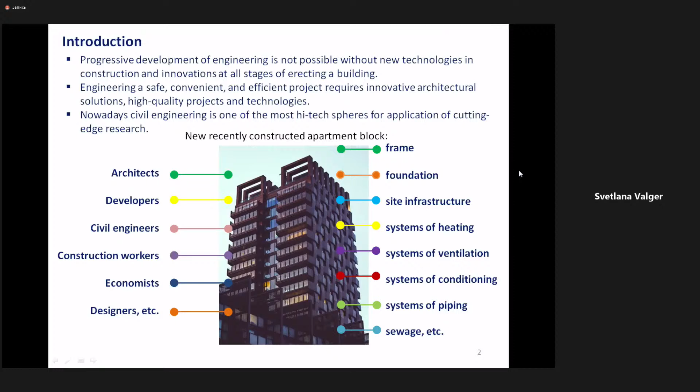Now let us consider the territory of this imagined building, the lot of land it stands on. We can see that the building is not separate from its surroundings and does not exist in a vacuum. It should match its surroundings and work as an ensemble with the other buildings in the vicinity. It should fit into the transportation system and be connected to the service lines of the city.

If this network of connections works efficiently and in a well-coordinated way, life in this kind of urban environment is safe and comfortable for pedestrians and citizens. The faster a city or town develops, the more complicated the service and adaptation of this system to new additions into the cityscape becomes. This is the reason why development and implementation of innovative solutions is so important in civil engineering.

Another topical issue for modern city planning is the development of urban planning and infrastructure within the framework of rational environmental management and sustainability. Anthropogenic impact on the environment grows every year, and the dynamic system of a modern urban settlement must be based on the principle of minimizing this impact and prioritizing preservation of the already existing natural landscape. Anthropogenic impact of a city on the existing ecosystems of the territory under construction should be motivated and justified, and urban sprawl and growth of industrial clusters pose challenges for the international research community.

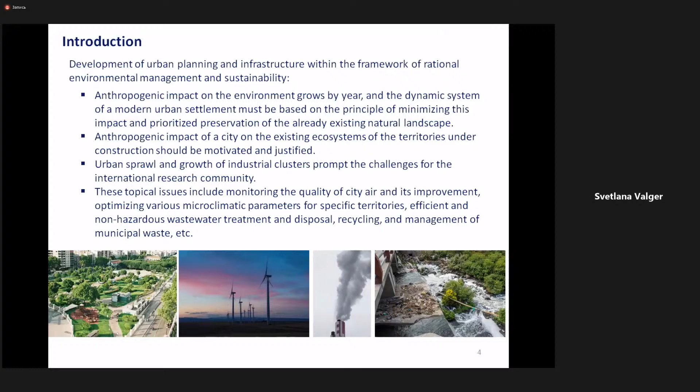Here we see several pictures. I put two very nice pictures about the location of green zones in the city and wind energy technologies integrated into city structures. The third and fourth pictures are not very good, showing pollutant distribution and waste. So in our case, we have to use modern technologies to create scenarios like the good pictures and avoid outcomes like the bad ones.

It's common knowledge that the technology breakthroughs of recent decades have made digital technologies an essential part of daily professional activities of architects, civil engineers, designers, and other specialists. Record-keeping, design and visualization of the architecture vision, calculation and engineering are nowadays highly digitalized processes. We have specialists who are experts in this process, and all routine work is processed by program complexes and software, numerical simulation and algorithms, but not an expert.

It's now impossible to imagine development of new construction materials, experimental research, new building projects, and practical tests of new construction methods without computing technologies, numerical simulation, CAD and CAE systems. We will speak about these definitions a little later, in the second part of our presentation about modern software, computer-aided engineering, and computer-aided design programs. Digital solutions are also necessary for processing the data of physical tests, computing experiments, and engineering calculations.

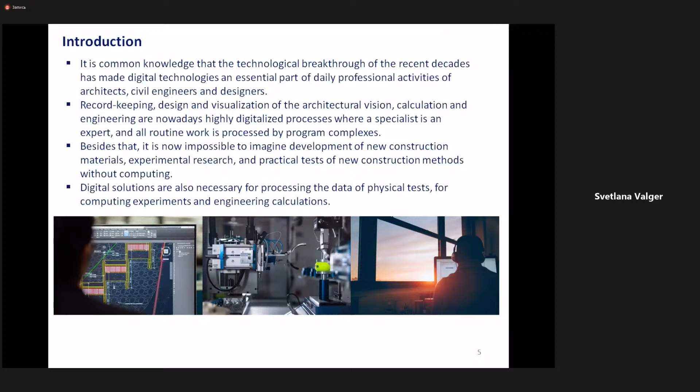Our first goal for today's lesson is to obtain information on exciting digital technologies in city planning and give definitions of several key terms common in this field nowadays. I hope this part will not be very boring for you, because of course we will have several key terms and definitions, but I hope it will be interesting also.

This is our content. The first part of the presentation is the smart city concept. We will speak about definitions like smart city, virtual city, industrial revolution, and additive manufacturing. The second part will be about classification of program complexes for engineering solutions - computer-aided engineering programs, computer-aided design programs, computer-aided manufacturing programs, building information modeling, and other questions.

The third and last part of our presentation today will be about numerical simulation of urban aerodynamics using computer-aided engineering programs. I will show several cases of numerical simulation for aerodynamics. We will speak about applications of computational wind engineering in environmental problems, and I'm sure it will be very interesting for all of us.

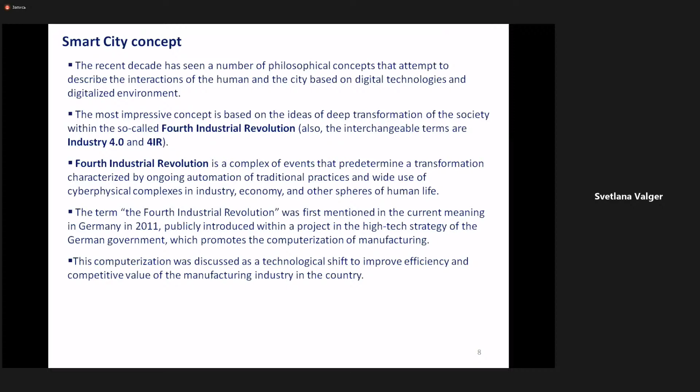It sounds beautiful. In the article of Klaus Schwab, who is a Swiss economist and executive chairman of the World Economic Forum, he presented his vision of the transformation within the paradigm of the fourth industrial revolution and listed the major challenges for the people, for citizens, caused by it.

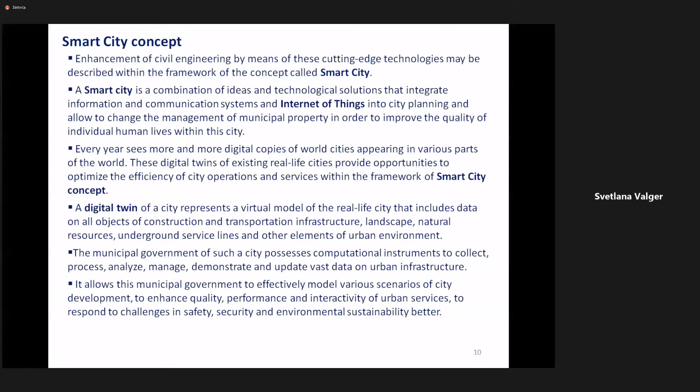And on the next slides, we will speak also about applications of smart city in environmental problems and in civil engineering, and I show several interesting examples.

I would like to show two examples. The first example is digital city technologies in Singapore. You can find more information about this project on this website, and I would like to make a short review of this project. During the recent decade, the authorities of the city-state have been investing into the development of Singapore's digital twin.

His name is Virtual Singapore. Virtual Singapore is a dynamic 3D model of the city and the platform for coordinated data for processing, for analysis, and this platform can be utilized by state, private, and research operators to manage assets, resources, and services to improve the quality of city planning and to develop protocols for possible emergencies, technogenic and environmental catastrophes.

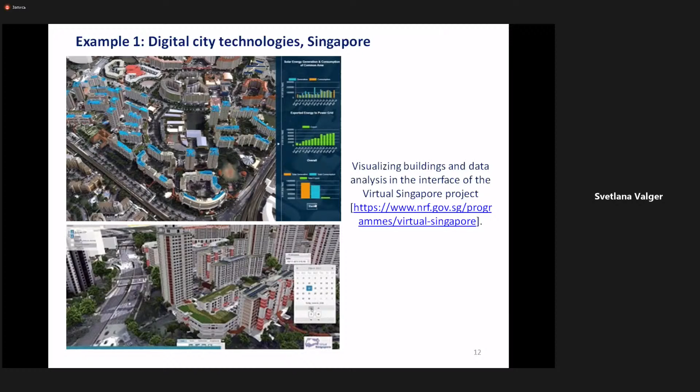So, if we speak about Singapore experience from the point of view of the enlisted information technologies, Virtual Singapore is a combination of instruments of semantic 3D model of individual elements of the city and its environment. This model includes geometrical models of city, buildings, civil structures, any objects, including the exterior and interior surfaces.

Information about water bodies, vegetation, and other landscape elements, the system of transportation infrastructure. It could be also different metadata about materials, building materials, for example, and data collected and stayed on public agencies, updated and enhanced by means of geospatial and other platforms such as OneMap, People Hub, Business Hub, etc.

This meta model has a considerable advantage. First of all, it enables to add new layers of data and metadata instantaneously to the authentic digital model. If we have changes in our city, we have changes in our digital model.

And one can access data from a wide range of sources of dynamic statistical city data and various extra information in real time. For example, we can obtain statistics and analyze it about climatic data, commuting, demographics, and others.

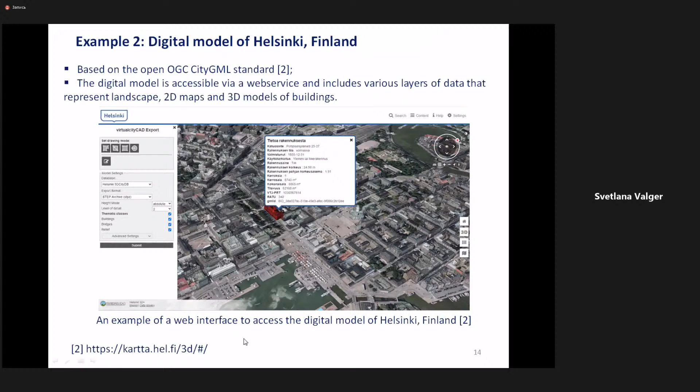So, what applications can be realized using smart city concept more efficiently?

Above all things, this kind of model must have a purpose of processing geometrical, statistical, and other data for future engineering and mathematical modeling of possible situations and city management. Here I show just several examples of what applications we can realize.

Using the smart city concept, using the digital twin of a city, and in the third part of my presentation today, we will see different kinds of problems, different solutions, and different cases. Here are just several problems.

It's the air quality problem: control, monitoring, and calculating different scenarios of pollutant concentration distribution in the air of the city. As we know, it's a big problem for large cities, and it's necessary to control pollutant dispersion and gas dispersion. We can use a digital twin model of the city to model, using computational fluid dynamics methods, for example, micro-scale parameters of distribution of heavy gas and pollutants.

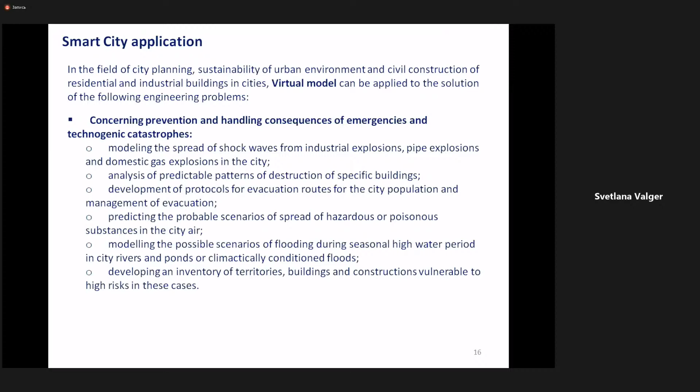The next one is modeling the possible scenarios of flooding during the seasonal high water period in city rivers and ponds under climatic conditions, and developing an inventory of territories, buildings, and constructions at high risk. So it's about the opportunity to use such models and technology to prevent technogenic catastrophes and different kinds of emergencies.

The next one concerns rational environmental management and sustainability issues. For example, it's the calculation of noise pollution or acoustic problems in specific territories caused by various sources, such as noise pollution from highways, airports, industrial buildings, etc. It helps us make our districts and buildings more comfortable and healthy.

So, the calculation of heat pollution of urban territories and prognostic parameters of the city's heat island effect. Probably you know that in cities, the temperature is higher compared to the surrounding area. This effect is the heat island effect, and if we can control or manage it, it can help us reduce energy sources for our city, for example. It's an interesting fact that now in Siberia it's minus 17 degrees, but that's of course not a reason to be upset.

So the next one is modeling microclimatic parameters and microclimates of individual areas. It's also about the heat island effect — different microclimatic parameters like humidity, wind flow direction, wind flow speed, temperature of air in the city, etc. The next one is analysis of the potential for alternative energy sources.

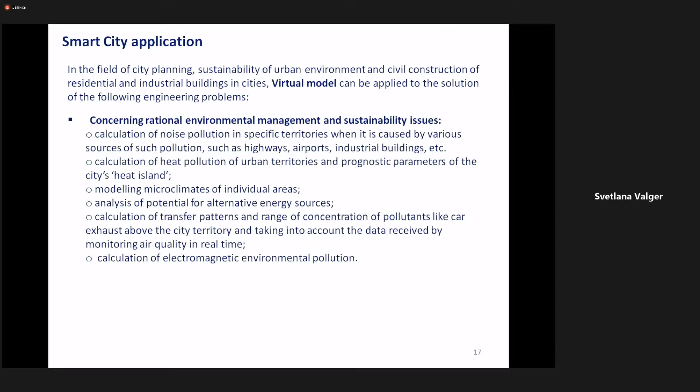So, the next group of applications concerns city planning. We can solve more efficiently such questions as choice of location for new buildings and design of buildings. We can use visualization for the suggested project in the context of the existing building area by means of a 3D model. For example, you have a beautiful 3D design of your building, but you can't imagine how it will be involved in the surrounding area, or if we already have a densely built area, like in city centers of large cities, it can help us visualize our design and understand if it's okay or not.

The next one is application of innovative high-tech solutions and technologies in engineering unique objects. For example, it's the research and assessment of aerodynamic loads, elasticity loads, and snow loads on specific buildings, bridges, high buildings, and calculation of pedestrian comfort of specific territories, etc.

And the last one is the application of innovative technologies for the development of optimal schemes of connection of buildings to the city service lines, operation decisions on service line management, repair and development of them. It can help us be more accurate in the sphere of using resources.

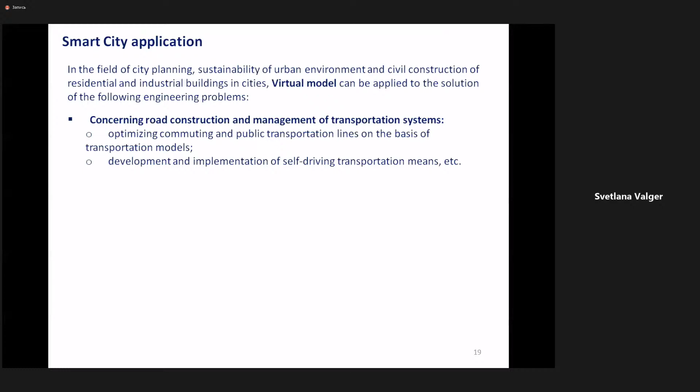So, the last point of this part of the presentation is about integration of the technology of smart city and Internet of Things. We already know the definition of Internet of Things, and we already know the definition of digital twin, but these terms should work together - there needs to be a necessary level of integration of the model into the Internet of Things. This concept implies that objects of infrastructure shall be equipped with technologies that allow them to interact with one another in the environment. The digital twin of the city typically interacts with the Internet of Things by means of various sensors, detectors, trackers, and gadgets.

For instance, sensors that monitor road pollution, noise level, temperature, microclimatic parameters, road congestion, etc., may transfer their data to the digital model of the city and become triggers for finding solutions and changing the schemes of regulators and city infrastructure, such as traffic lights and other means. These technologies work together - such systems can rearrange and improve economic and social processes and help us optimize management of city assets and property. It's possible to reduce energy consumption, optimize traffic, and increase general comfort of citizens using these technologies together, the smart city model and Internet of Things.

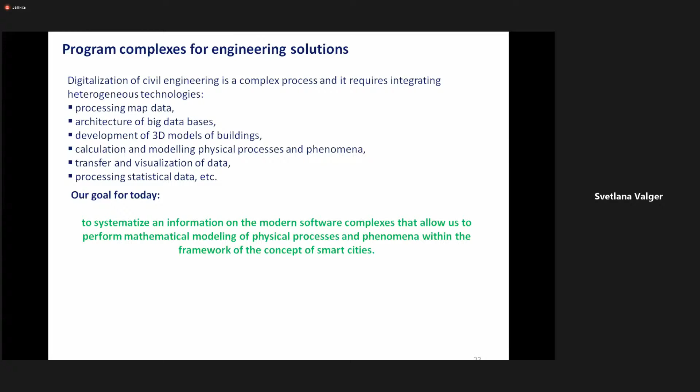Our goal for today, the second goal of our presentation, is to systematize information on the modern software complexes that allow us to perform mathematical modeling of physical processes and phenomena within the framework of the concept of smart city. First of all, I would like to show you several definitions. These are very general definitions, just terms for our next slides to make it easy.

The first one is application suite, as a complex of application software and programming software of related functionality. Most often they share a similar user interface and are able to exchange data with each other.

Also, it's a very general definition of computer-aided technologies. Probably you know these computer-aided technologies are application software, programming software, and all technologies aimed at aiding specialists in design, implementation, analysis, and manufacture of products.

Also, probably you know the subject definition like PLM. Sometimes you see engineering software with the prefix PLM. PLM is product lifecycle management, a set of technologies to manage the entire life cycle of a product from inception through engineering, design, and manufacture to service and disposal of manufactured products.

The last definition on the slide is building information modeling, BIM. It's IT technology, IT modeling of buildings. I can say that it's not just a technology, it's an ideology of modeling that involves generation and management of digital representations of physical and functional characteristics of places as databases and systems of data concerning planning, design, construction, operation,

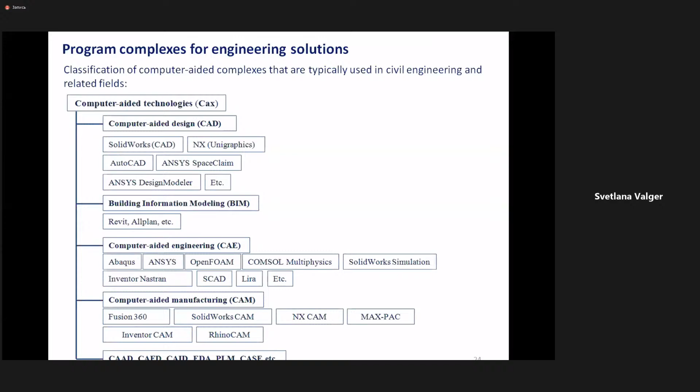For example, it can be Fusion, SolidWorks, NX, MAX-PAC, Inventor, RhinoCAM, etc. And of course, we have a lot of additional definitions for computer programs, and in our lecture we will not speak about them.

Computer-aided design programs, or computer-aided design systems, are used for drafts, technical figures, 2D or 3D digital models of manufactured and engineered products and their systems. The target audience for such software are architects, civil engineers, graphic design professionals, and sometimes other specialists from different departments, for example machinery engineers or somebody like this.

Modern CAD systems differ in their approach to geometrical modeling. In computer-aided design systems, we speak about geometrical modeling, 2D and 3D spatial modeling. It can be parametrical or direct geometrical modeling, and being equipped with special add-ons for executing drawing packages in a specific field, like civil engineering, machinery, or aerospace. For every field we can have special packages which integrate with CAD systems and help to make our 2D and 3D models.

An example of this is, in Russia, the CAD system AutoCAD. It's extremely popular for executive drawing packages, as it allows drawing and drafting in accordance with localized norms, standards, and rules, and this is usually very important, because it's easy to use if you have a special database with nodes and standards, and you don't have to develop new libraries.

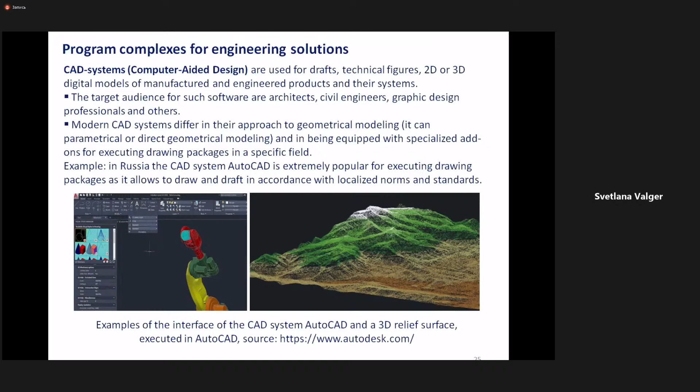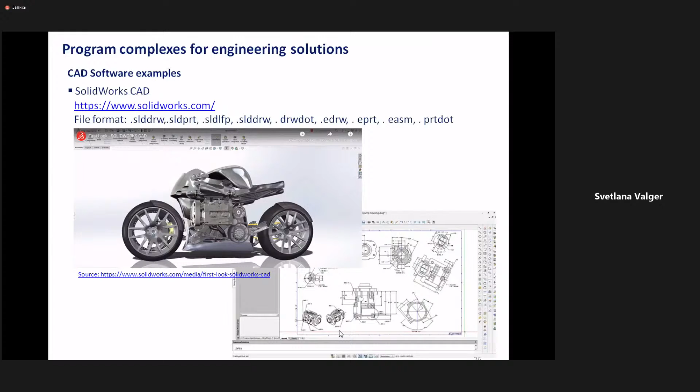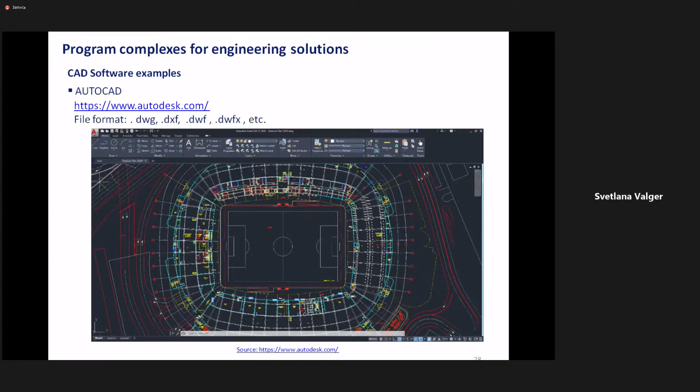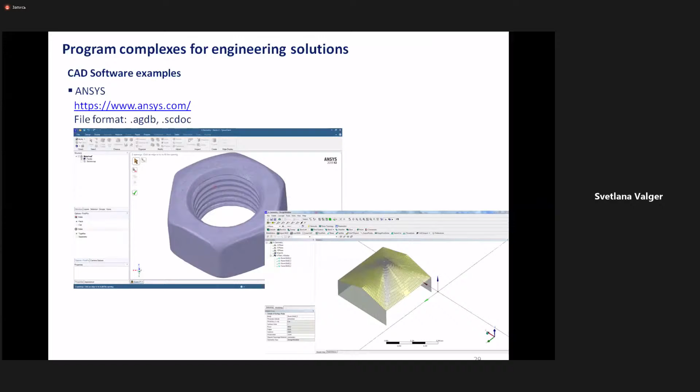The next example is ANSYS. ANSYS is my specialty, I think, because I've worked with ANSYS software for a long time. Here we can see also the www.ansys.com site and the file format for this CAD software. It's interesting to know that ANSYS in this way is not only a CAD system, it's also a CAE system, but about this we will speak a little bit later. Here we can see Space Claim and Design Modeler interfaces for our CAD software complex.

So the next definition is CAE systems - sometimes we say CAE systems, computer-aided engineering systems. It's a new definition for us. Computer-aided engineering systems are used for digital modeling of various physical processes and phenomena. If we speak about CAD systems, we speak about models, about 3D geometrical models. If we speak about CAE, it means that we speak about calculations.

Such systems are used for digital modeling of various physical processes and phenomena, including problems in environmental modeling and design of equipment, instruments, and various infrastructures. Computer-aided engineering complexes are a type of software aimed at providing solutions for engineering and research problems in prediction, analysis, and calculation of parameters of physical processes and phenomena.

In most cases, computer-aided engineering systems and packages of software are based on digital representation of numerical methods for solving differential equations. Oh, mathematics. In our life, we have mathematics. Yeah, mathematics is very important.

We have different kinds of numerical methods, and I put just a general list, but it's not all. There's finite volume method (FVM), finite element method, finite difference method, and others. For example, smoothed particle hydrodynamics method (SPH), etc.

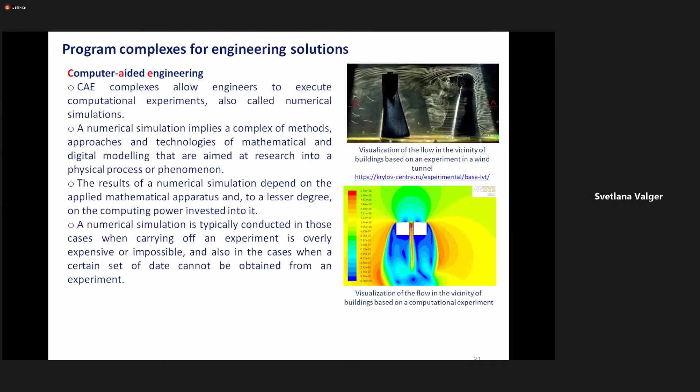As a rule, computer-aided engineering complexes are aimed at addressing the problems within a specific field of physics or for a specific industry. For instance, there are specialized program complexes for computational fluid dynamics (CFD) and finite element analysis (FEA). Let's start to tell about computational fluid dynamics, CFD.

CFD is a branch of continuum mechanics, a science that addresses the issues of predicting parameters of liquid flows and gas flows based on physical, mathematical, and numerical methods that enable calculating the characteristics of a flow. For example, you would like to investigate mass transfer processes, heat transfer processes, chemical reactions, or concentrations of individual components of a multi-component flow phase, etc.

Here I put several examples of CFD problems from different sites - some are my own results, and other pictures are from websites. These are examples of CFD problems and results, demonstrating different kinds of results for different physical problems. For example, it's a multi-phase flow in a tank with water and air, or it can be wind flow in the vicinity of two buildings, or wind flow around building systems, like in this case.

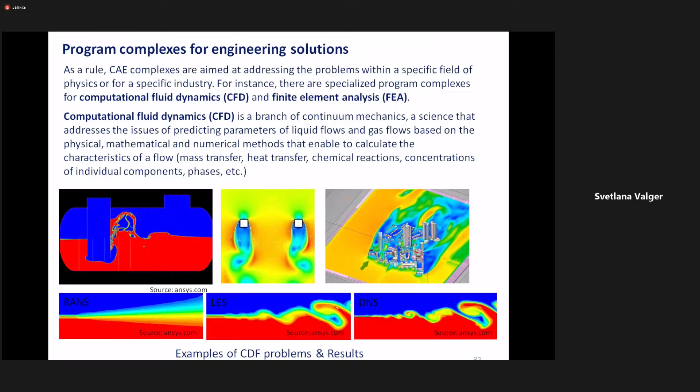It can also be turbulent flow, for example in a channel or something like this, and it can be calculated using different numerical methods in CFD. The object of research in computational fluid dynamics is a liquid or a gas. In English, it's just a fluid.

Examples of CFD applications include numerical modeling of the transfer of car exhaust and calculation of its concentration above an urban territory. This is a task that can be solved by means of CFD methods.

The next example is a solution of a problem and assessment of aeration of a specific territory based on detailed physical and mathematical modeling. Look at the picture. It's an example of numerical simulation of aeration within a city district.

The photo shows speed 2 meters above the ground level. We can evaluate velocity speed in different zones. We can see the wind direction from this angle, and we can see high wind speed in this zone, in this channel, and in this zone the maximal velocity is in this place. We can analyze this picture.

We can do additional solutions. For example, we can design new green zones, parks, or develop new technologies to eliminate such high wind speeds. For example, we can put several trees in this zone and see, in our scenario, in our CFD modeling, what we will have as a result.

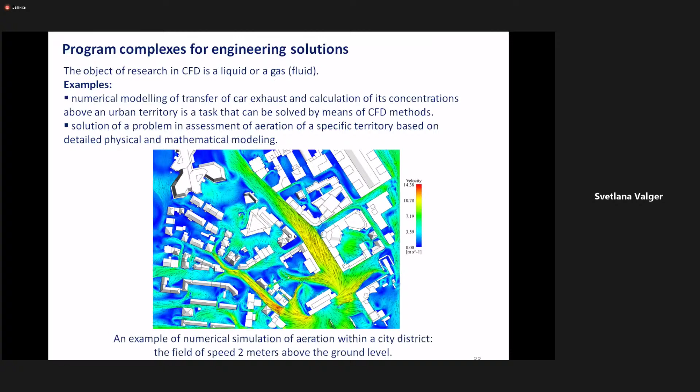Functions implemented in computer-aided engineering CFD software usually model physical processes and properties of liquid and gas media. It can be external flow and internal flow. External flow is, for example, in aerospace engineering, or wind loads on buildings calculation. Internal flow is flow in channels, for example in piping systems, pipes and tubes and other channels.

We can also calculate multi-phase and multi-component flows with different kinds of particles, drops, bubbles present in the presence of a discrete phase.

Of course, it's necessary to model turbulence in practical applications - turbulent flows, flows with chemical reactions, for example emission transformation from cars, and natural and forced convection. This applies if we speak about thermostats of rooms, or thermostats of building systems of conditioning, heating and ventilation.

It's a problem of conjugate heat transfer - joint modeling of the thermal regime in a solid, for example in civil structures, and in the surrounding gas volume, for example wind. Also thermal radiation, solidification and melting and related processes, magnetic hydrodynamics problems, acoustic, subsonic, supersonic and hypersonic flows for different kinds of applications, and complex properties of fluid, for example non-Newtonian fluids in oil and gas manufacture.

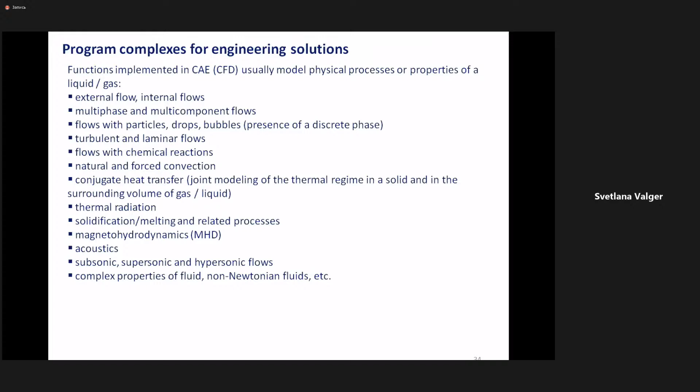So what applied problems of CFD can be solved in the civil engineering field and in the field of open environmental problems? It's wind load on buildings, aeroelastic phenomena, for example in the design of bridges and high-rise buildings. It's very important to take into account aeroelastic phenomena and put additional loads in calculations.

It's hydrodynamic loads on objects of hydraulic structures, external aerodynamic and hydrodynamic loads on oil platforms, for example, and modeling flows in pipelines, microclimate parameters in buildings, heating, ventilation, air conditioning systems, filtration tasks through enclosing structures, heat exchange through multi-layer enclosing structures, design tasks for water treatment facilities, sedimentation, filtration, water treatment, design of wind power plants, tasks of assessing scenarios and parameters of smoke pollution.

For example, in cities, like now in Novosibirsk, and movement and filtration of groundwater, etc. So we have a lot of applications where we can use CFD functionality in the field of civil engineering.

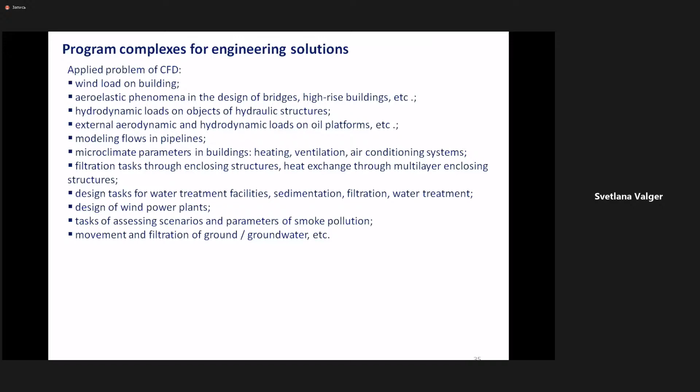The next point is computer-aided engineering - finite element analysis methods. Finite element analysis, or FEA, is a method of computational analysis that allows us to predict the behavior of complex structures. Finite element analysis has become widely popular in solving problems connected with calculation of reactions of structures and constructions to various types of mechanical, heat, and electromagnetic loads and their combinations.

Functions implemented in computer-aided engineering software with finite element analysis usually describe the behavior and properties of structures under different types of loads. It's stress-strain analysis - the most popular - strength testing according to various criteria, buckling analysis, modeling of nonlinear fracture dynamics.

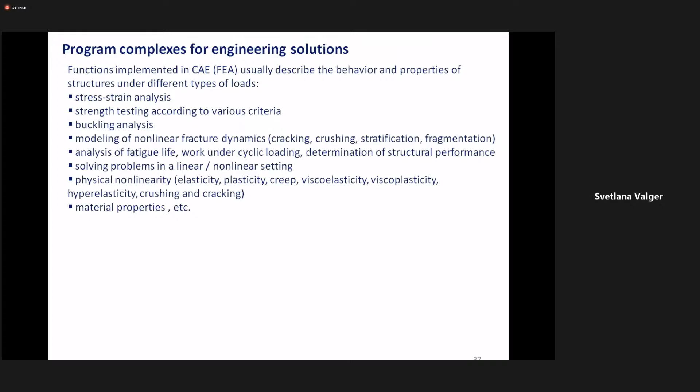This includes cracking, crushing, stratification, fragmentation, analysis of fatigue life, work under cyclic loads, determination of structure performance, solving problems in linear and nonlinear settings - physical nonlinearity, elasticity, plasticity, creep, viscoelasticity, viscoplasticity, hyperelasticity, crushing, and cracking - and the opportunity to model complex properties of materials.

So we have a lot of applied problems of finite element analysis in real life and in civil engineering. It's design of buildings and structures, calculations of stress-strain of structure elements, calculation of forces and displacement from load combinations, and selection of reinforcement in elements of reinforced concrete structures, for example checking the bearing capacity and selection of sections of structural elements.

The second one is the problems of geotechnics and design of foundations tasks. It's analysis of strength and stress state of foundation of buildings and structures, checking the strength and stability of systems, evaluation of the stability of foundations, and calculation of shear safety factors. Design of retaining walls, tunnels, and other tasks of geotechnics in the field of filtration, poroelasticity, groundwater behavior, etc.

The next point is the thermal tasks and tasks of heat engineering. It's the energy efficiency of the building, calculation of enclosing structures for resistance to heat transfer, material behavior under low temperature, calculation of thermal deformations, and - very important - the problems of safety of buildings, fire safety tasks, calculations on fire resistance of structures and materials. It's also very important today for design of buildings and structures.

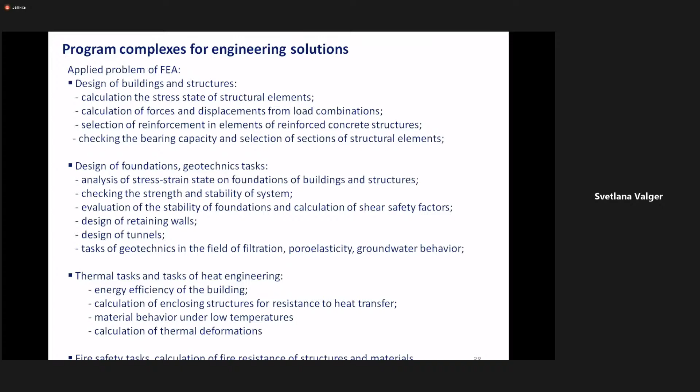In CFD software, we can say about ANSYS software, ANSYS CFX, ANSYS Fluent. This software is used in Novosibirsk State University of Architecture and Civil Engineering in different kinds of investigations and in teaching process. And StarCD, Autodesk Simulation CFD - it's interesting because Autodesk, it's a software on geometrical model, it's a CAD system, but Autodesk has a lot of add-ons now to model different processes, for example, in the field of computational fluid dynamics. And COMSOL Multiphysics, SolidWorks Flow Simulation, FlowVision, OpenFOAM, Phoenics, etc.

In examples of finite element analysis software, we can set ANSYS Mechanical, Abaqus, Autodesk Simulation, COMSOL Multiphysics, CosmosWorks or SolidWorks in the part of CAE system. SolidWorks has a CAD system and CAE system together, and LS-DYNA, Nastran, etc.

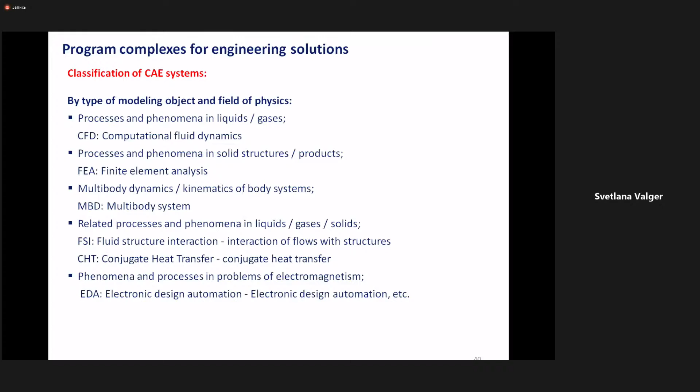The next classification of computer-aided engineering systems can be completed by industry. For example, computer-aided engineering in civil engineering - in Russian we have well-known software like Lira SCAD, and other software like APM Civil Engineering, etc.

Computer-aided engineering in mechanical engineering problems - it's, for example, SolidWorks Simulation, Autodesk Inventor. Also we have computer-aided engineering in problems of electronics, for example ANSYS Electronics Desktop, and multi-physics computer-aided engineering complexes, which can help us solve problems in multi-physics, or for example in FSI, fluid structure interaction analysis, or CHT analysis.

It can be ANSYS, Abaqus, and it's also important to note that today many various computer-aided engineering software are combined. Sometimes, for example, if you would like to calculate something, you can use computer-aided design Autodesk or AutoCAD and make a 3D model in this program, and after this you can transfer your model to the next product, for example to Abaqus or SCAD.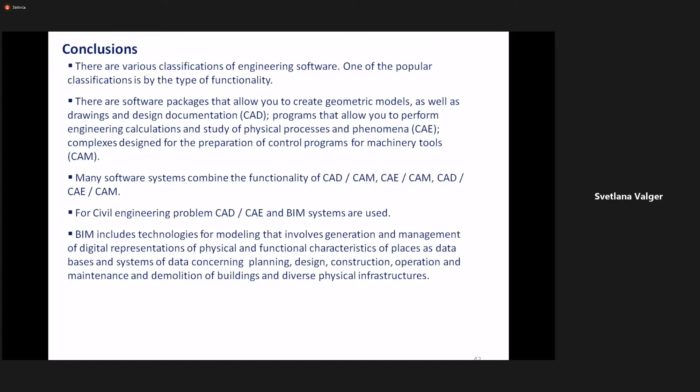So BIM includes technologies for modeling that involve the generation and management of digital representations of physical and functional characteristics of places, as databases and systems of data concerning planning, designing, construction, operation, maintenance, and demolition of buildings and diverse physical infrastructure. So, these complexes allow us to solve engineering problems.

Computer-aided engineering complexes can be classified by industry purpose, by the field of physics - for example, what we would like to investigate: fluids, structures, electromagnetic problems, or heat transfer problems - and by the type of numerical modeling methods, for example finite volume method, finite element method, finite difference method, or other methods.

By the type of licenses, there is much software, free or non-free, and we have to understand what is better for us, for our questions, our problems, and our tasks.

Computer-aided engineering complexes allow carrying out a computational experiment complementing a physical experiment. This means that in computer-aided engineering complexes, we work only with a computer, and we have a numerical simulation on our laptop, for example. In several cases, this can help us understand main features and special features of a process which can't be obtained from a physical experiment.

And the computational experiment, as a rule, includes the following steps - I think it's better to say I will tell about this in the next part of my presentation. The computational experiment, as a rule, includes several main steps.

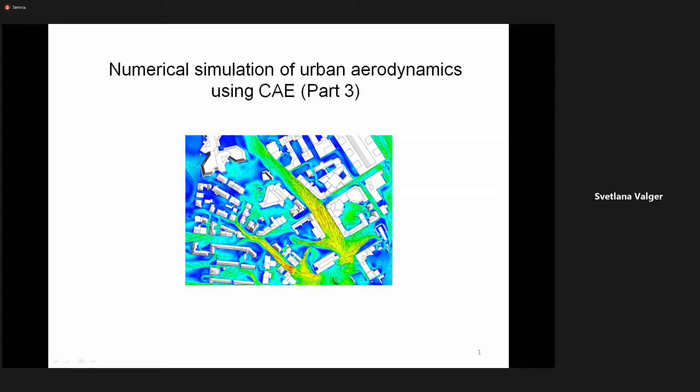So, and the last part of our lessons today will be about numerical simulation of urban aerodynamics using computer-aided engineering. It's part 3 of our lessons, of our workshops and lectures. We can see a very nice picture here. And so let's start, we continue.

Okay, and urban aerodynamics applications. So we have already seen this picture. It's about applications in the sphere of computational wind engineering. I would like to show an additional definition. It's computational wind engineering, or CWE. CWE is an application of computational methods to wind engineering problems. And there are many interesting applications in this field.

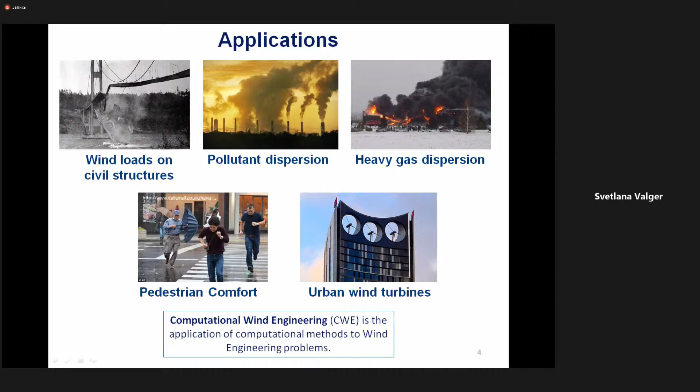It's a calculation of wind loads on civil structures. It's a calculation and control for pollutant dispersion and heavy gas dispersion. It's design and planning of cities, taking into account comfort in pedestrian zones. And it's also about wind turbine design when we integrate wind turbines into the buildings, for example. In this case, it can be very innovative and very helpful and useful to provide additional energy for the building.

So, wind loads on civil structures - why is it so important? Wind actions affect constructive durability, stability, and service conditions of buildings significantly. For high-rise construction projects and buildings with high head resistance, the wind flow substantially increases the dynamic load, and it may lead to stability loss and collapse. Dynamic wind blows that cause oscillation of the building may disrupt the normative service conditions in the space on the top floor of high-rise buildings.

And for construction projects with complex architectural solutions, there is a possibility that zones of wind amplification or zones with negative pressure may appear, and it leads to a change of load spread on the construction. Aerodynamic coefficients in these cases are not known, and it's necessary to make a wind tunnel experiment, or you can make a numerical simulation. The wind action on the construction may lead to the development of aerodynamically unstable oscillation, stall flutter, galloping, divergence, wind resonance. Especially it's important for high-rise buildings and for unique buildings and structures like bridges. Wind loads may cause the collapse of hinged facades, commercial billboards, etc. And that's why it's necessary to calculate wind loads on civil structures.

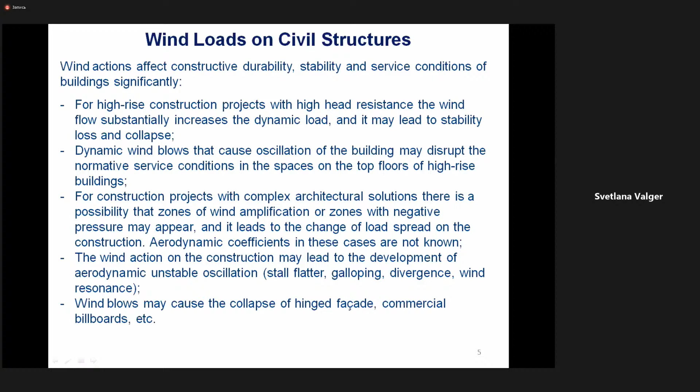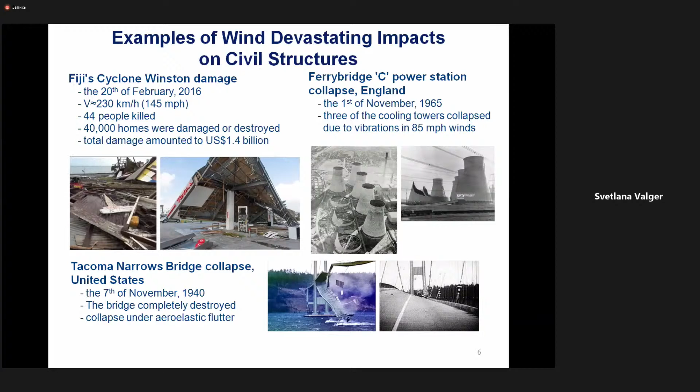Here we have very bad examples of wind devastating impacts on civil structures. It features Cyclone Winston damage, Ferrybridge Power Station collapse, and Tacoma Narrows Bridge collapse. It's a well-known story and fact, and all building aerodynamics started to develop after this incident, after the Tacoma Narrows bridge collapse, because before this story, aerodynamics was usually about aerospace or something like this. After this case, engineers and researchers began to think about aerodynamics of buildings, bridges, etc.

So, and what kinds of solutions do we have to predict wind loads on buildings today? There are three main groups of methods. The first one is wind tunnel experiments. It's a well-known and correct approach, and it's recommended when buildings have a shape that is different from those given in standard rules or any technical rules.

Buildings are located in a complex environment, and the results in this case depend on the technical capability of the facility, because it's very difficult to make a wind tunnel experiment. It's necessary to have a special aerodynamic facility, and of course we have to follow different criteria with wind tunnel. It's necessary to organize experiments with a geometrical model, a physical model of the building or complex of buildings, and usually it's very expensive.

The next part of methods is CFD modeling. I will speak about this group a little bit later, and also technical rules, standards, and Eurocodes. Technical rules and standards are based on semi-empirical formulas and experimental data, but they have limits and can't be recommended when buildings are located in a complex environment, on complex terrain, or have a complex shape.

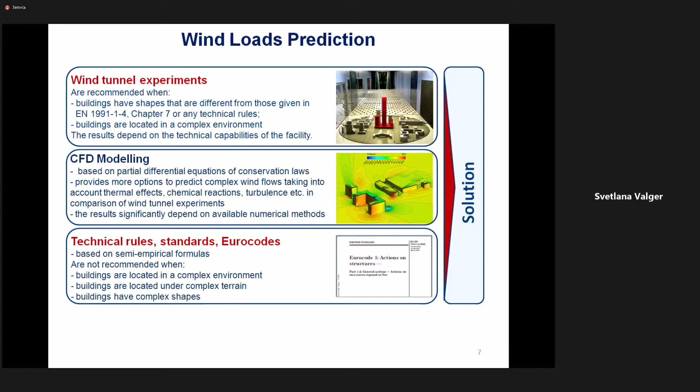The third part of methods is CFD modeling, based on partial differential equations of conservation laws. We already know about CFD methods, computational fluid dynamics, and finite volume methods, for example. CFD modeling provides more options to predict complex wind flows, taking into account different effects in the flow, such as thermal effects, heat transfer, chemical reactions, pollutant transfer, and turbulence. In comparison to wind tunnel experiments, CFD modeling can provide more options, so in the next part of the presentation we will speak about CFD modeling.

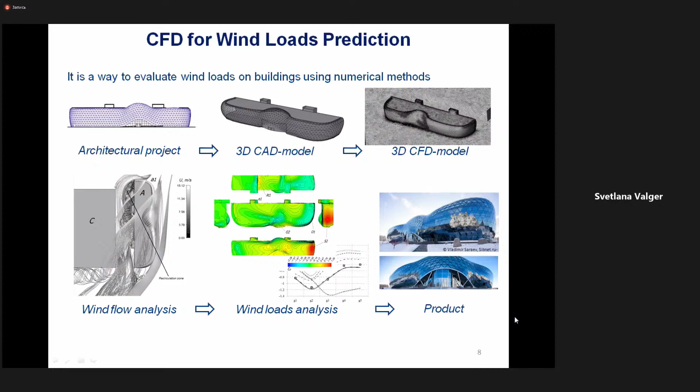The next application is pedestrian comfort problems. Urban environment research from the point of view of pedestrian comfort is key to the development of a favorable environment for people. We have already seen problems about pedestrian comfort in the previous part of the presentation, about increasing wind flow velocity between buildings, for example. Increase in building density leads to substantial changes in the aerodynamics of the surrounding buildings, and poor building placement at the stage of area planning may cause local wind speed increase, insufficient aeration of the area, microclimate problems, etc. That's why it's very interesting and important to make calculations of pedestrian comfort.

We also need to focus on evaluating wind action in the pedestrian zones at height - about 2 or 2.5 meters above the ground and lower. The urban environment for pedestrian comfort is also influenced by heat conditions, humidity conditions, chemical pollution, and noise pollution, and using numerical simulation, we can do it.

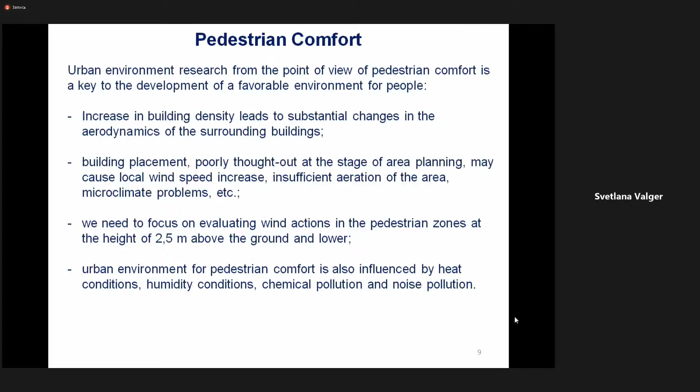Investigation for pedestrian wind comfort using CFD - just an example from my calculations, done several years ago for Frankfurt Main city center. These are buildings in Frankfurt Main city center; there are many low-rise buildings and some high-rise buildings in the urban environment, and a very busy road here. Our task and our challenge was to model the wind flow around the buildings, and understand how the big, high-rise buildings influence the low-rise building coverage, and pedestrians.

With this picture, we can see the wind velocity distribution at pedestrian height of 2 meters. We can see here the typical problem zones for pedestrian wind, here and here.

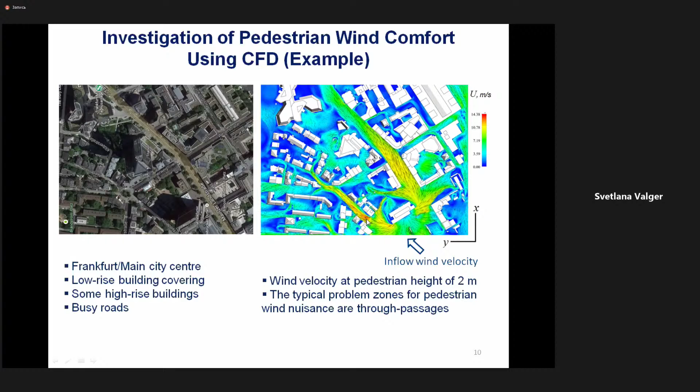So the next one is urban wind turbines. The research enables finding solutions for alternative energy sources in the city. Turbines may be placed on the roof of buildings to capture wind. Optimal location of wind turbines on buildings will raise their effectiveness.

While flowing around the building, the structure of wind flow changes significantly, and during the flow stall from the edge of a building, the speed of wind increases, which may be used for more effective work of wind turbines integrated in the building. And it is possible to model dynamic and vibration loads on the wind turbines.

Using numerical simulation, we may optimize and improve wind turbines in order to decrease their noise level. This is a very important problem for integrating wind turbines into buildings, for example in a city, because it can lead to a high level of noise.

It's a very beautiful example, an example of a high-rise wind turbine's advantage and disadvantage. It's a residential high-rise building, Strata, in London, and it looks wonderful. We can model air velocity with airflow at different wind directions, and we can predict the main parameters of wind turbines and optimize construction and design.

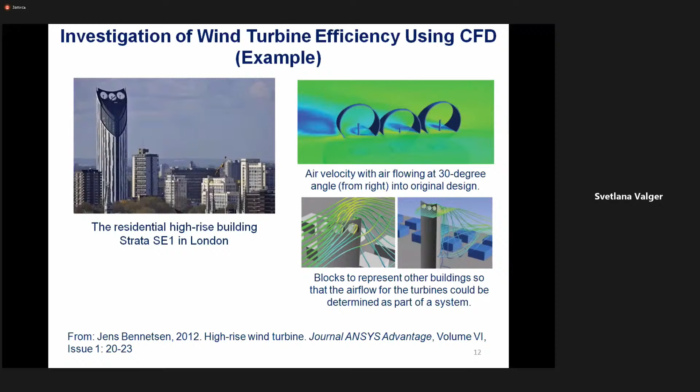So the next application is pollutant and heavy gas dispersion. Industrial objects, energy producing facilities, transport, and other facilities that provide for human activity in large cities become sources of pollution in the atmosphere, in the low part of the atmosphere, in the surface layer of the atmosphere. Explosions and fires of industrial objects lead to uncontrolled outbreaks of toxic gases, which is catastrophic for the environment and for human health.

That's why it's important to predict different scenarios of pollutant dispersion in air in cities. Studying air composition in an urban environment is a complex task, because it requires taking into account many options, many features of the air, for example a large volume. We have to analyze a large volume of information about sources of pollutants, which could be, for example, transport or tubes, something like this.

We have to take into account weather conditions, predominant winds and wind directions, humidity, presence of green zones, and filtration mechanisms in the low part of the atmosphere near buildings.

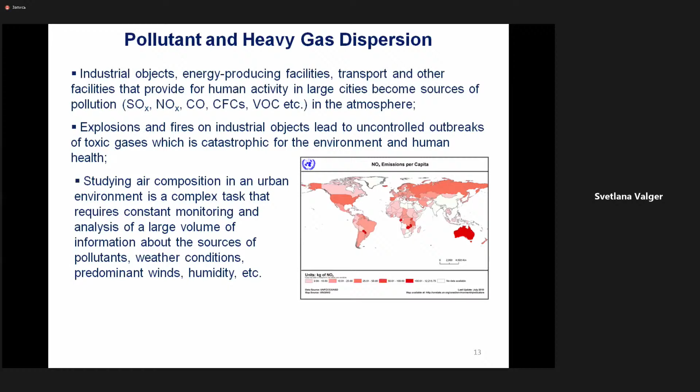This is also an example of CFD for pollution dispersion analysis built by a CADFEM company, and here we can see one street of Munich. Here we can see a 3D CAD model in ANSYS Space Claim, and the numerical simulation was performed for this territory, and mass concentration of NOx were obtained. What kind of results can we obtain?

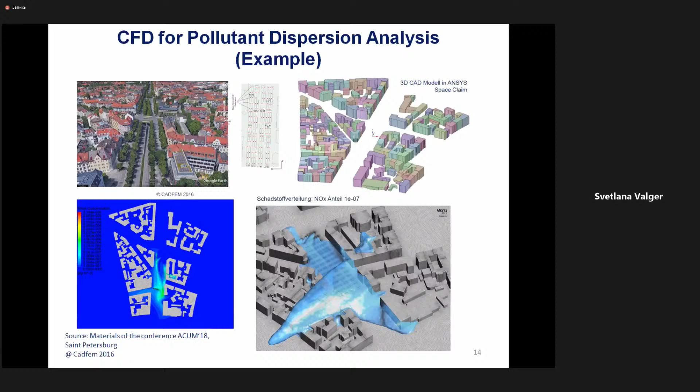It's the concentrations, velocities of flow, and temperature of flow, and also we can develop special technologies, structures, or zones to decrease concentration of pollutants in pedestrian zones, for example in living districts near roads.

So the second part of this third part of presentations, a very complex system of presentations in my lessons, is wind flow features in the vicinity of buildings and their complexes. I would like to show several statements and definitions about wind flow in the vicinity of buildings.

Buildings are bluff bodies with edges, and estimation of wind loads on buildings is an important stage during their designing. Wind loads may lead to loss of building stability and its collapse, we know it. To estimate wind loads, we can use CFD, and we can predict flow structure around buildings, new buildings, or already densely built areas.

The structure of the flow in the vicinity of the building depends on the shape of the building, the roughness of building walls, and the thermotechnical characteristics of the building, thermal regimes, and on parameters of the inlet flow. It's the conditions of the atmospheric boundary layer, to account for turbulence and heat transfer effects, and terrain presence.

And surrounding densely built area, because the structure of flow in the vicinity of buildings significantly depends on interference effects in flow if we have a surrounding densely built area.

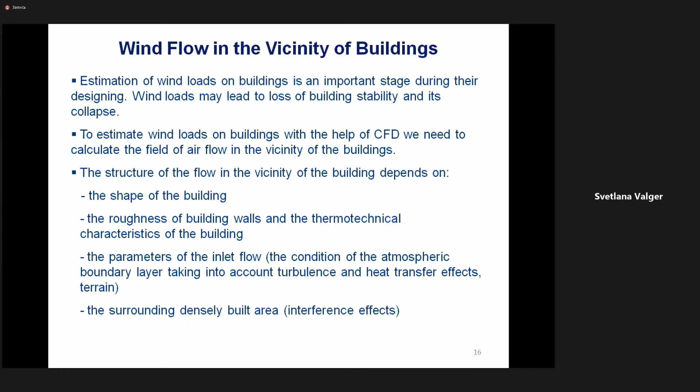So, if we use experimental data, it's very difficult to get such flow structures, but using numerical simulation we can get additional data about flow structure that we can't see on wind in reality, but we can model it using numerical simulation.

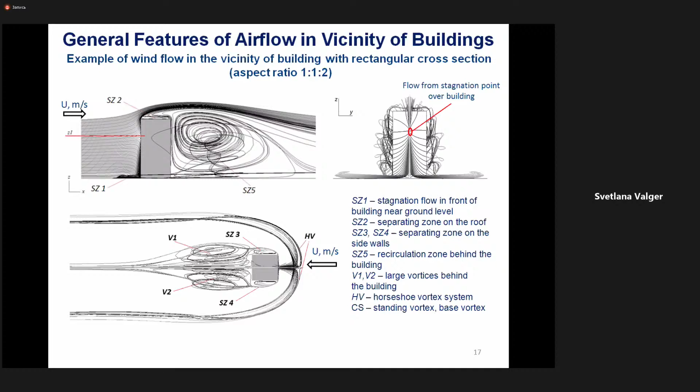What about recirculation zones? I would like to show you an example with a recirculation zone behind the building. It's a leeward zone. The domain located in front of the building is an overpressure zone. Wind flow energy loss in front of the building leads to a decrease in aerodynamic pressure behind the building relative to atmospheric pressure, and aerodynamic coefficients in leeward zones have negative values. This is a well-known fact about flow structure around a building with such a shape.

Here we can see profiles of absolute velocity in different vertical sections in the vicinity of an isolated building, from literature.

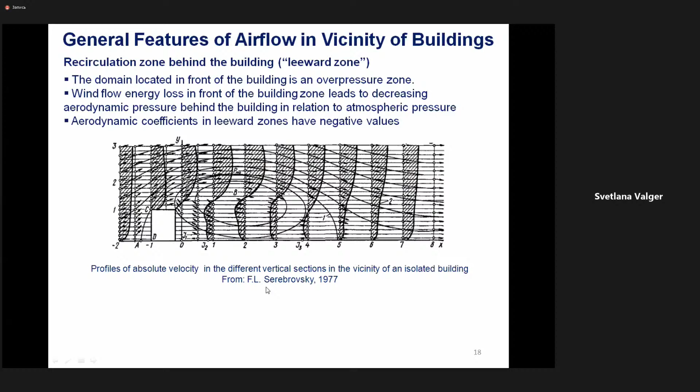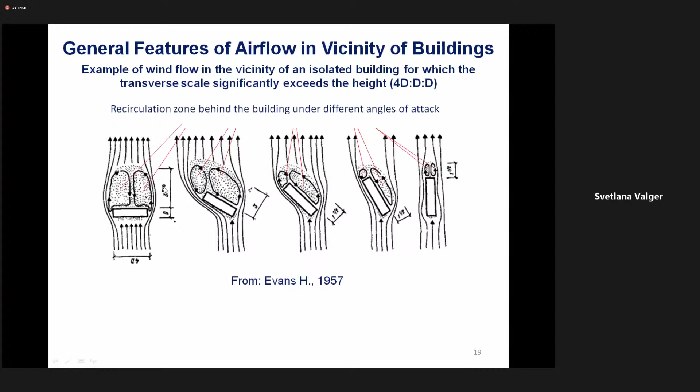The next feature of wind flow structure around a building is here. This is an example of wind flow in the vicinity of an isolated building for which the transverse scale significantly exceeds the height. We have different angles of attack, different wind directions, and we can see the differences in flow structure for each direction. In this case, the recirculation zone looks very small, while for the first case, the recirculation zone looks very large.

It depends on many factors, including wind flow direction. So the next aspect is the effect of terrain on the aerodynamic characteristics of buildings.

There are different cities, several located on terrain, and several located on a flat plain with non-uniform terrain. If a city is in such conditions, non-uniform terrain leads to changes in the values of the velocity head, restricts the flow, and changes the character of flow around the building. This means that not only the shape of the building or the wind direction can influence the flow structure — terrain can also lead to changes in flow structure.

And here is an example of the effect of terrain on the aerodynamic characteristics of a building, obtained using numerical simulation. We compare two cases: case one with a uniform ground surface — an isolated building located on a flat plate; and the second, a non-uniform ground surface — an isolated building with the same shape, but located on terrain with a non-uniform ground surface.

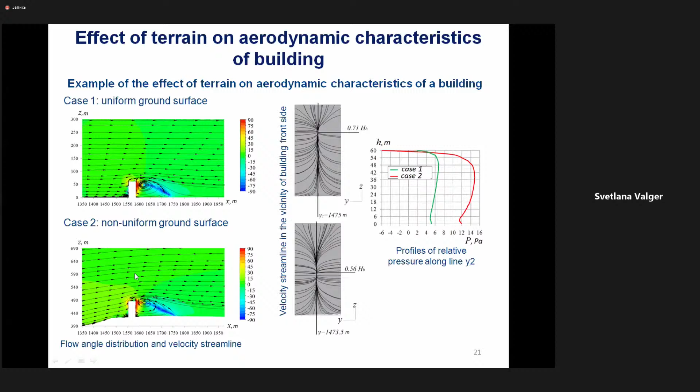The flow angle and flow direction were the same in both cases. We can see that terrain affects the aerodynamic characteristics of the building — we have different profiles of relative pressure along line Y2, a line built on the frontal part of the building, on the upwind side. This means it's necessary to take terrain into account in aerodynamic numerical simulations.

The next topic is the influence of city topology and densely built surrounding areas on the occurrence of interference effects in the airflow. Building complexes, as an obstacle system, can significantly modify the flow structure and lead to the formation of stagnant zones, recirculation zones, and vortices in the airflow.

In the case of parallel orientation of streets, for example case A, the wind flow is not blocked and flow velocity increases, as you can see on the slide. Where streets are located with a blocking orientation, it slows down the flow in front of the obstacles. This is also a result of numerical simulation — we can obtain vector velocity fields and evaluate the aeration of a district, and the district's topology from the aeration point of view.

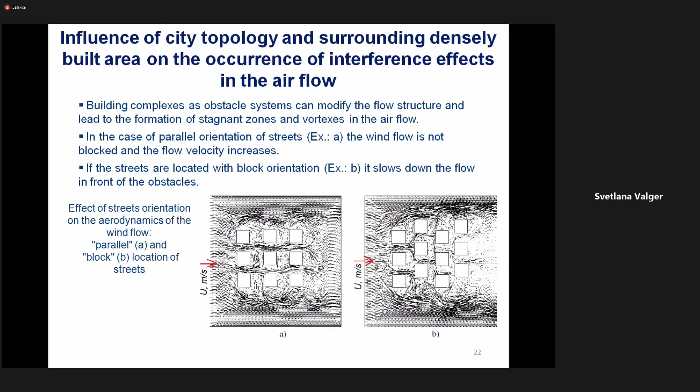The next example is the influence of airflow interference effects on building aerodynamics. It looks very interesting to me — the flow structure around building complexes. It's interesting to calculate wind loads on this building.

This is building A. If we look at the top view of the flow structure visualization for this building, we see many features: recirculation zones, a change in the angle at which the free stream meets the front side of building A, a vortex in front of building A, and a velocity increase up to 15 meters per second in the region between buildings A and C. This means we have very strong interference effects between buildings in the flow.

I would like to show you a comparison of two configurations for this case. The first configuration was a calculation of wind flow around the building complex, meaning we calculated flow around all of these buildings. The second configuration treated the building alone, isolated on a flat plate — for example, only building A, without any surrounding area.

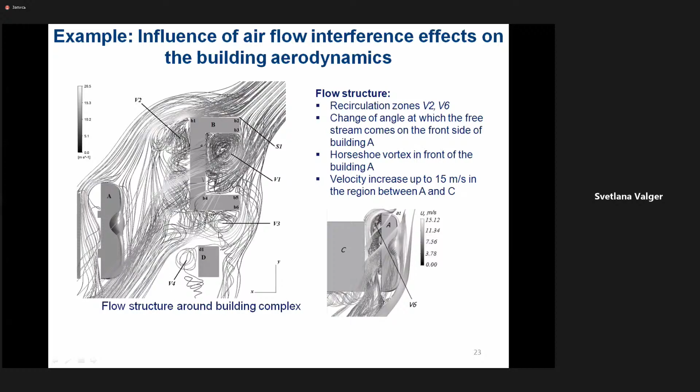That's configuration 2. Here we can see the pressure coefficient distribution on building A for configuration 1 and configuration 2, and we can see a significant difference between the cases in the pressure coefficient distribution.

It means that interference effects significantly influence the flow structure and the results of wind load.

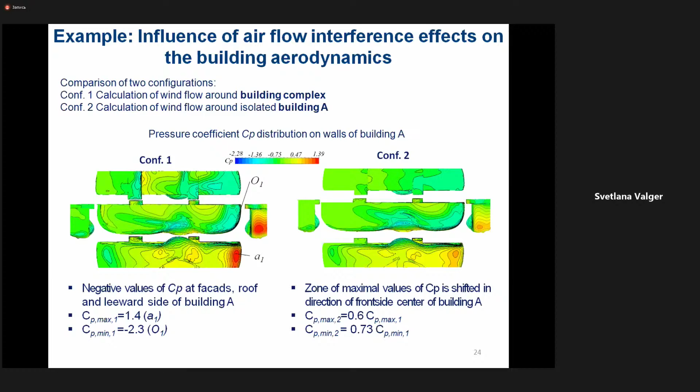The next part is turbulence models. It's a very important and complicated topic. One of the main characteristics of atmospheric airflow is its disordered turbulent nature, and airflow around buildings is characterized by high Reynolds number and turbulence.

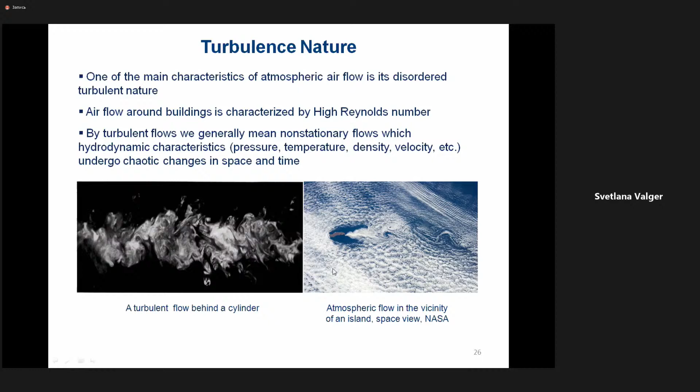Here we have two examples of turbulent flow: turbulent flow behind a cylinder, and atmospheric flow in the vicinity of an island. They look the same, but are different examples. Turbulence has characteristics: continuum, irregularity, diffusivity, dissipation, three-dimensional vorticity fluctuations, and turbulence is a feature of the flow, not of the fluid.

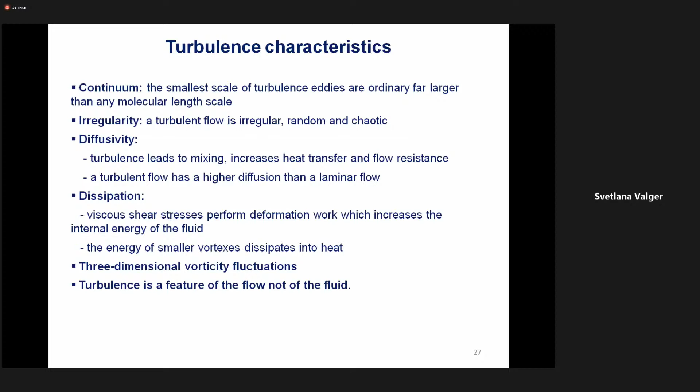There are many methods to predict turbulence using CFD methods, and there are three main groups: direct numerical simulation, large eddy simulation, and Reynolds-averaged Navier-Stokes equations. In engineering practice, the Reynolds-averaged Navier-Stokes method is widely used.

Large eddy simulation allows us to resolve eddy structures, but it takes more computer resources. Direct numerical simulation is not practical for applications because it takes a lot of computer resources and can't be realized for real building configurations.

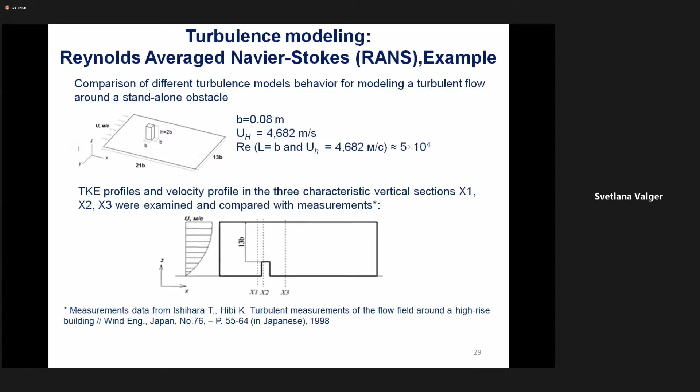I would like to show one example of how the turbulence model in CFD software can influence the results of a solution. It's a very simple configuration: a standalone obstacle on a flat plate. We compare results of numerical simulation for this configuration with experimental data, using different turbulence models for this.

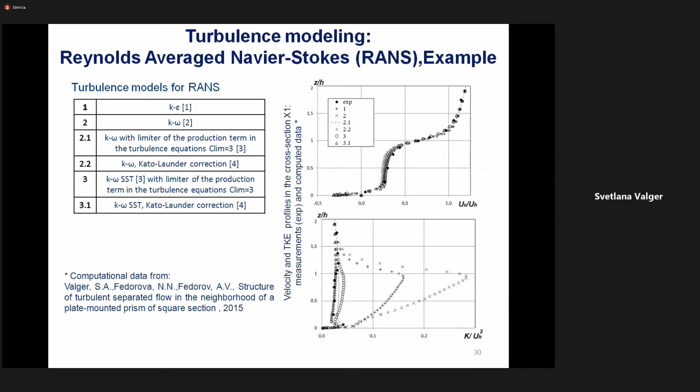These were RANS models, different RANS models, and we can see differences between various kinds of turbulence models. If we speak about velocity profiles, it's okay, but if we speak about turbulent kinetic energy, we can see that not all turbulence models can predict it correctly in comparison with experimental data.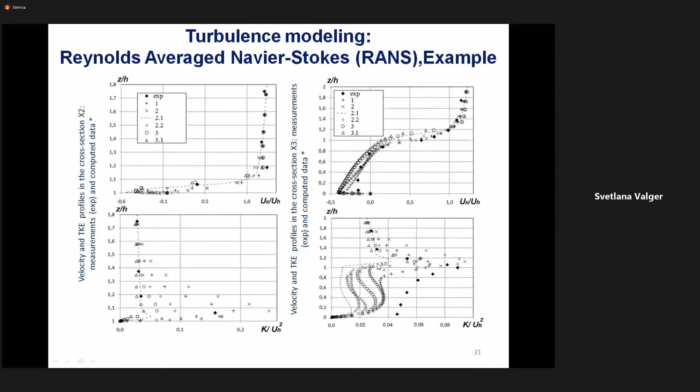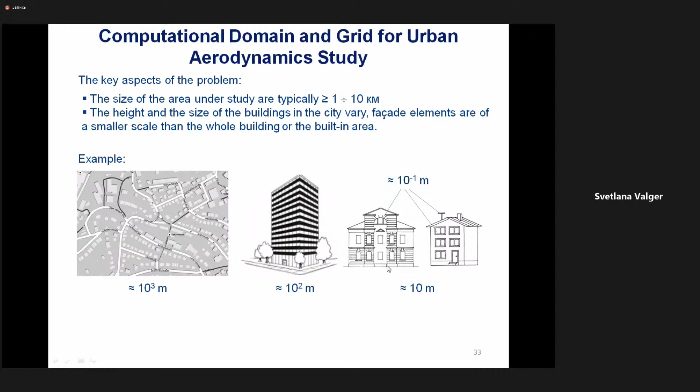So, computational domain spatial discretization. In this case we speak about key aspects of the problem. Probably you have such a question: when we work with aerodynamics of buildings, we work with very large computational domains. If you would like to calculate flow around a densely built area, it's necessary to calculate probably 1 or 2 kilometers of territory. The roughness of buildings, the building characteristic length, is about 100 meters usually, and we have a lot of small features in the design of buildings, usually 10 meters or 1 meter, so we have a lot of scales in our simulation. That's the first problem. The second part of the problem is that we have to work with a very large domain.

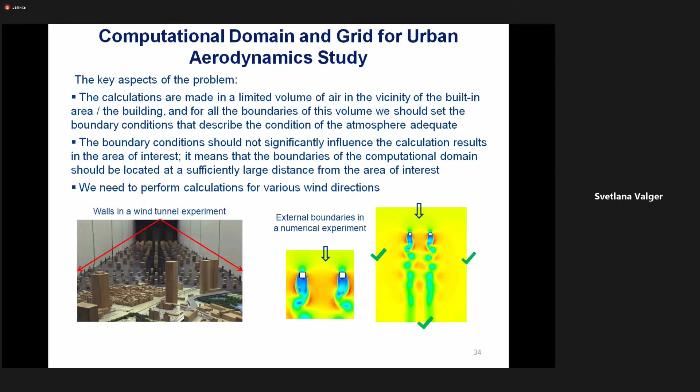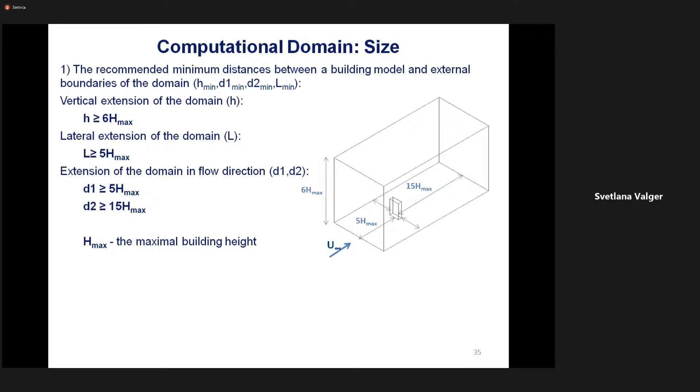There are main recommendations for choosing computational domain size, and it depends on the characteristic size of buildings, for example the maximal building height. These recommendations were obtained from experimental data, recommendations for experiments in aerodynamic facilities and aerodynamic tunnels. The second approach to choosing the size of the computational domain is to calculate a blockage ratio, which is the ratio of characteristic heights, for example of buildings, to the domain.

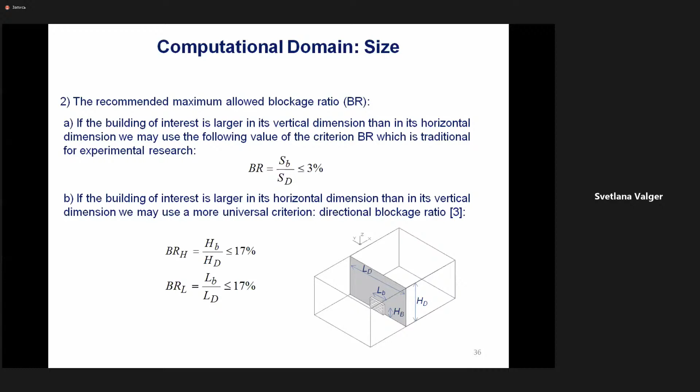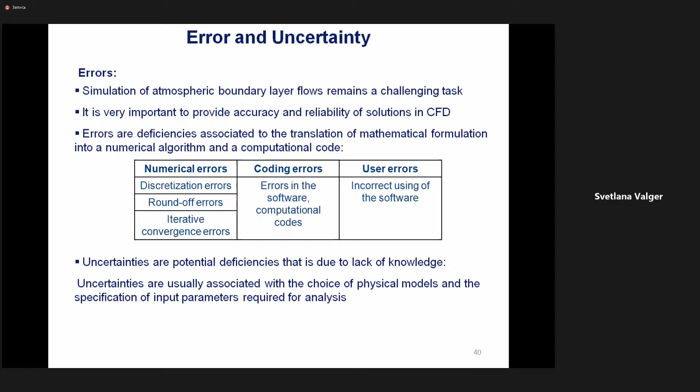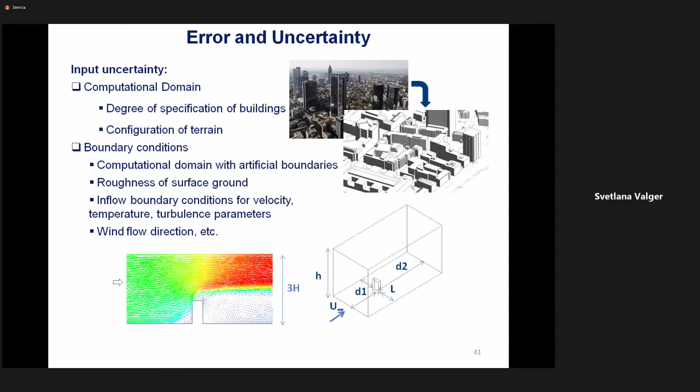Also, we have a problem with input uncertainty. First, it's the computational domain. Second is the boundary conditions, because we need to understand wind direction, what roughness of the surface ground can be used, what inflow boundary conditions for velocity, temperature, and turbulence parameters we can use, and what wind flow direction we can use in our simulation. It's very difficult to predict. Physical model uncertainty is a lack of submodel validation data and assumption of simplifying the physical model.

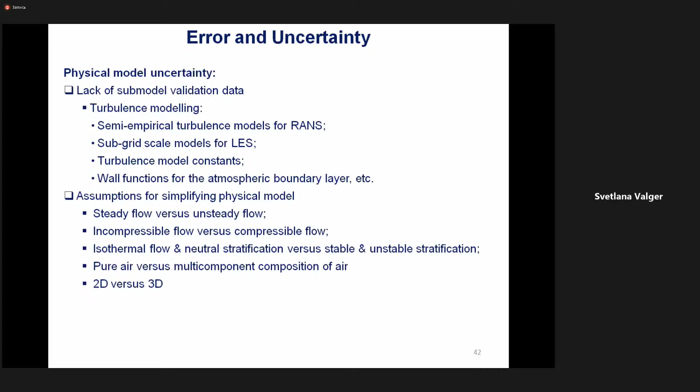So I think we can skip this slide and show what we can do with the results, and how we can verify and validate our results.

There are two main definitions in this sphere: verification and validation. Verification is evaluating the errors associated with the algorithms employed to obtain the solution of the governing equations. It means we need to provide CFD approaches and also use special verification tests to be sure our code is correct.

The validation process is identifying the appropriateness of the selected mathematical and physical formulation to represent the problem. It means we use CFD modeling and measurements. Measurements are experimental data. We have experiments, we have CFD numerical experiments, and we can compare results.

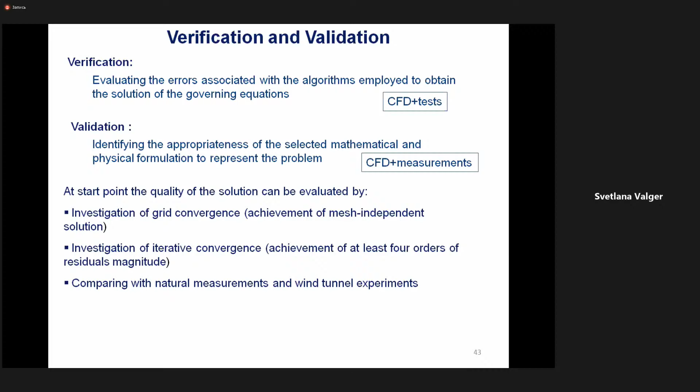At the start point, the quality of the solution can be evaluated by investigation of grid convergence, investigation of iterative convergence, and comparing with natural measurements and with wind tunnel experiments.

So if you would like to start calculating wind aerodynamics problems and ecological problems, for example for air quality prediction in CFD complexes, it will probably be useful for you to use benchmark tests. There's a benchmark test from the Architectural Institute of Japan and the COST model evaluation case studies, approach and results, to compare results of your simulation under test problems with data from experiments.

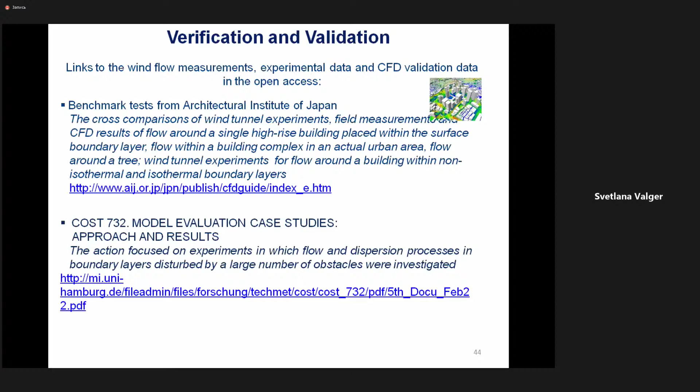So, in the last part of our lesson today, I would like to show a small example of a computational wind engineering problem. One minute, I have to change my presentation for this.

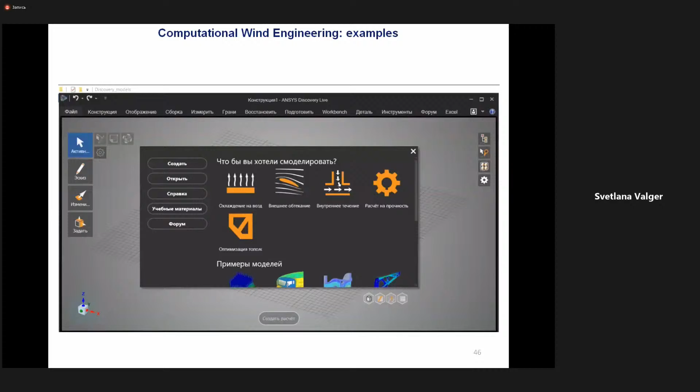I would like to show you a small movie about modeling wind aerodynamics using CFD. It doesn't matter here which CFD we use. It's necessary to understand the main principle and the main features of the calculation process.

Now we see the computer-aided design model with the relief and a small building, and we can build the computational domain and make all settings for the mathematical model. We talked about this a little bit today, and we can obtain results, for example velocity, pressure, temperature, or something like this. We can change the computational domain, like here, and get more exact results.